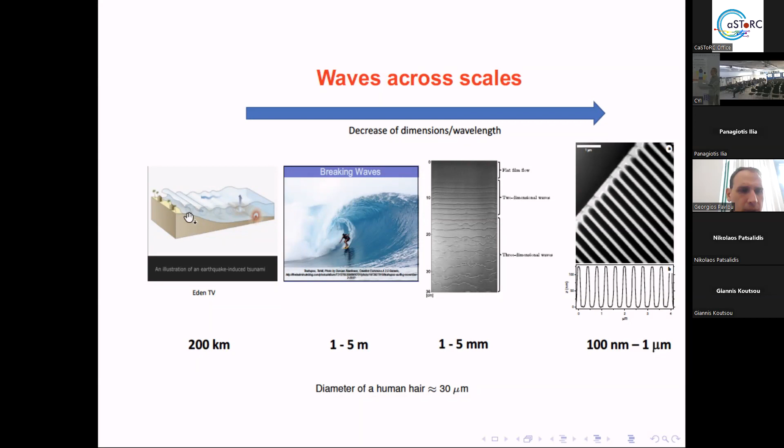So my main interest is to find unifying type equations and unifying mathematical ways of addressing such equations. So today I will talk more about this area of this diagram. But just to get an idea, here are some simple partial differential equations that describe some of these phenomena.

So if we start with wave motion, this is the celebrated Korteweg-de Vries, KdV, equation. This was the first time that solitary waves were found. So when you hear solitary waves, immediately you think of this PDE. It's a balance, it's about some steadiness, of course, but the balance between nonlinearity and dispersion. So these are just two physical things going on, nonlinearity and dispersion.

Then if we go further down the scale, we get equations very similar to this. If you look at this, there are more derivatives - this is the Kuramoto-Sivashinsky equation. Why is this interesting? Well, again, nonlinearity, mixing things up. But in addition, there is a fourth derivative here with a plus, which is diffusion - a bit like a second derivative on the right-hand side, but higher diffusion, so we call this hyperdiffusion sometimes. But then there's negative diffusion as well, because this term has the wrong sign. Usually for the heat equation we see it on the other side with a plus sign, so this is negative diffusion.

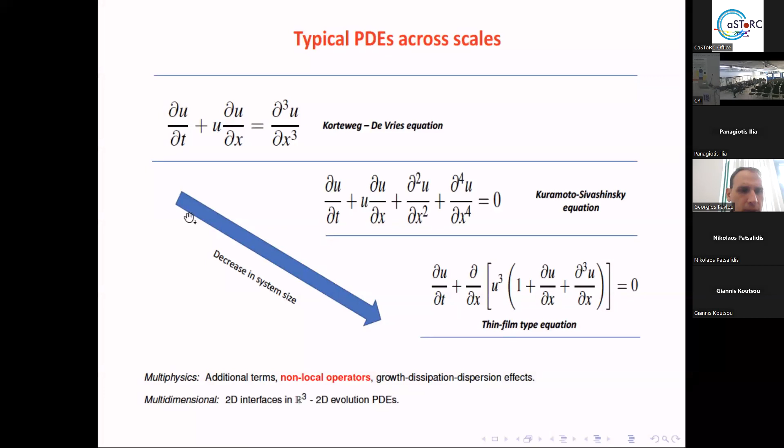Deriving these equations from first principles from the equations of fluid dynamics. So you're right, this term is dispersion - there is no viscosity whatsoever here. In this case, this term is surface tension, and that's why there's a high curvature, high derivative. And this term is inertial destabilization - it's to do with destabilization due to sufficiently large inertia. And here there's no inertia, that's why we get the degenerate PDE. But yes, these are all derived from first principles. Hopefully, and I'm probably already running very late, but hopefully I will show you how these are derived in a slightly more complicated example than these.

The objective is to do engineering on the small scale, particularly microfluidics, where things are fairly stable unless you have external forces doing things. For example, you can push these systems out of equilibrium by electric fields, magnetic fields, oscillations, and all these different things.

The basic feature at these small scales is that surface to volume ratios are large, and therefore surface tension is important. In particular, things like surface tension, electrical charges, and surfactants will all play a role.

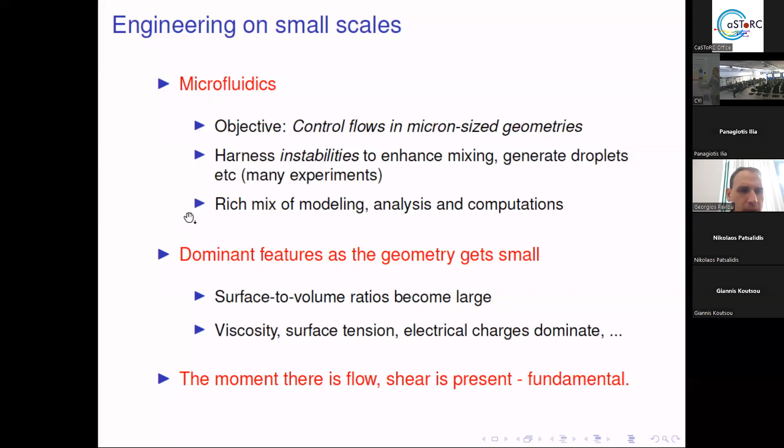I want to consider another physical effect: imposing shear flow on these things. In other words, they will be flowing due to either gravity or pressure gradients and so forth. So that's the objective, and here are some examples.

This is an example we already saw: a falling liquid film on an inclined plane, fed from the top. As things evolve, they become unstable, first two-dimensional, then three-dimensional, and by the time you're further down, that's spatial temporal chaos already. You can characterize all of that.

This is called an open system because there's only one liquid and then air, and you ignore what happens above. Whereas these types of problems have two fluids with an interface in between.

But always interfaces, yeah, that's the key — or more than two fluids too, which is even more interesting.

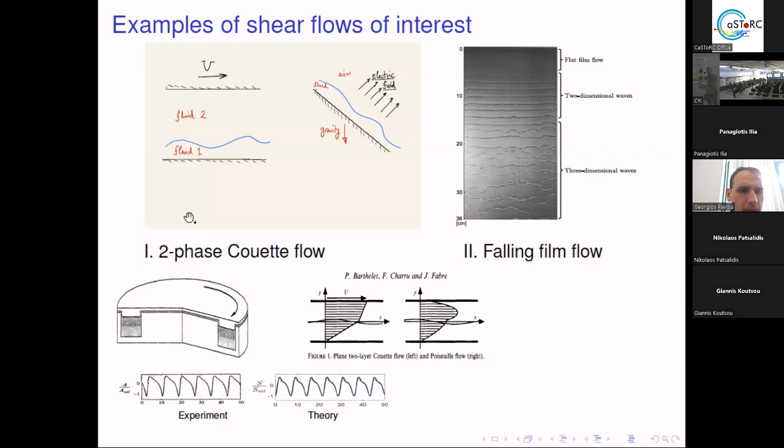These could be pure shear type flows, or you could also have a driving pressure gradient, in which case these would be piecewise parabolic profiles, as we get from exact solutions of the Navier-Stokes equation. So where do these waves come from?

These are classical fluid dynamical effects, hydrodynamic stability results. What we know is that if I have a single phase—one liquid, no interface—and I shear it, doing a hydrodynamic stability analysis via the Orr-Sommerfeld-type equations, you linearize and get your Orr-Sommerfeld equations. Then plane Couette flow, with just one shear, is linearly stable at all Reynolds numbers. It doesn't mean it's not nonlinearly unstable, but it's definitely linearly stable for all Reynolds numbers.

Experimentally, below about 1200 or so, they do not see any perturbations growing. Plane Poiseuille flow, on the other hand, again without an interface, just a parabolic profile, is linearly unstable for Reynolds numbers bigger than 5,000 or so. So again, small Reynolds numbers should be stable.

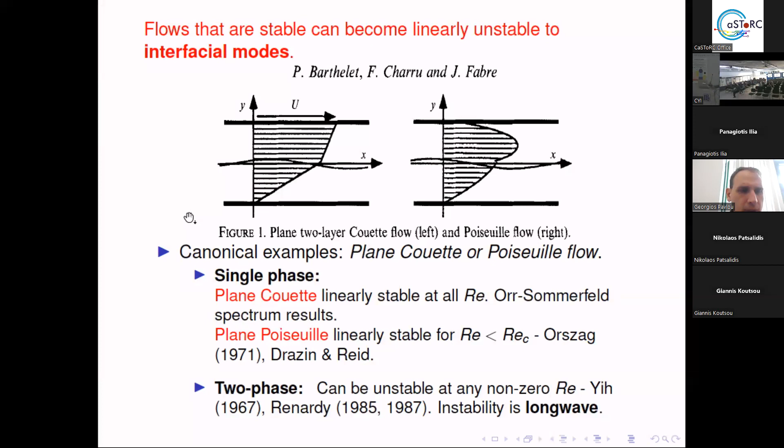The moment you put an interface in, these things change. In fact, you can show that the moment there's an interface there, it will become unstable. There will be an unstable interfacial mode active at any Reynolds number, irrespective of how small it is—it doesn't have to be critical and above. And the instability is long wave, though of course it depends on the various parameters.

This is what has been determined for two-layer flows: fluid one below, fluid two above, with different viscosities, mu1 and mu2. If the thinner layer... this result comes from analyzing the Orr-Sommerfeld equations.

If the thinner layer is also the more viscous, then you get waves, then it's unstable. So that's the result: if mu1 is bigger than mu2, then it's unstable.

So it all depends on the geometry of the configuration and the ratio of viscosities. The mechanism is quite complicated. I don't want to go into it here, but mathematically you can show this in a straightforward way.

So what do I want to do? I want to consider systems like this, having the experiments in mind. And what I want to do is follow the instabilities into the nonlinear regime. I don't want to stay linear, I want to go nonlinear.

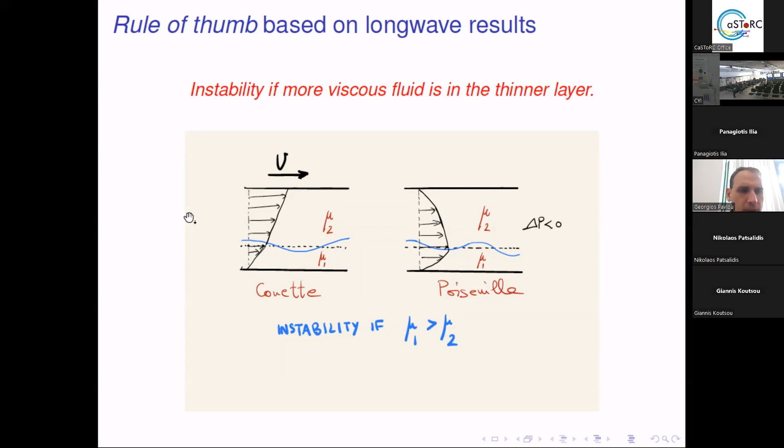The way we will do this is by doing an asymptotic analysis of the equations of motion with just one assumption: that this layer is thin compared to that layer. And that happens in experiment. That will be the only assumption I'll make. Well, actually not exactly the only one, but that's the main assumption.

So we'll derive reduced dimension models, partial differential equations, solve them, and then solve the Navier-Stokes equations directly, compare them, and then also compare with experiments. Then towards the end, the last third or so, we will look at multi-layer flows with interfacial slip.

In all these situations, I assume that the two fluids have no slip between them. But there are systems where you get interfacial slip, so we will replace those boundary conditions with Navier slip conditions.

So let's go through, and I think that goes back to the question earlier of how these are derived. The idea is that I may have more than two fluids, so a bunch of multi-layer configuration like this with lots of interfaces. Then the Navier-Stokes equations are valid in each region.

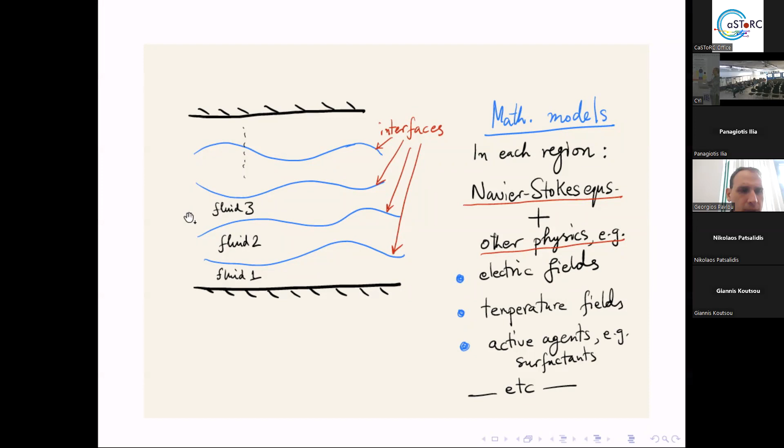There could be other physics as well, like electric fields or surfactants that diffuse and convect and also go into the interface, temperature, and so on. So this is kind of the multi-physics environment that we want, and we actually considered most of these things.

So what are the equations? The equations of motion are the incompressible Navier-Stokes equations, written here. Here I gave them for Newtonian flows, but these could be viscoelastic. You can modify with your favorite viscoelastic model, and I'll show something on that.

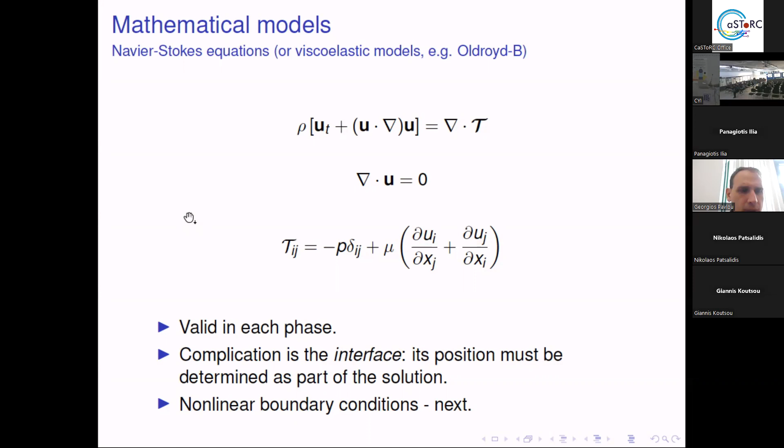This is complicated enough, but the additional complication is that the boundary of where you need to solve these equations is changing in time, so you need to determine that as well. So I need boundary conditions at the interfaces, and I'll show you what those look like next.

So if I suppose that there's some shape, a function that describes the interface between fluid 1 and fluid 2, then I can write down boundary conditions on this interface. And again, this comes from balancing forces — it's all mechanistic.

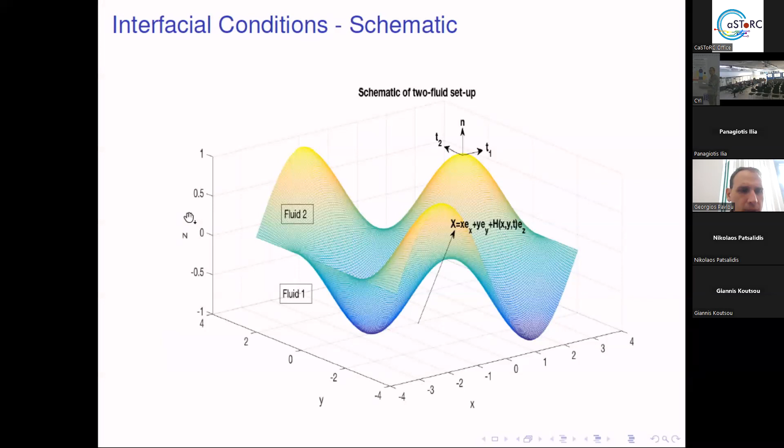And these are the boundary conditions. One boundary condition says the fluids are viscous, that the velocities are continuous. By this angular brackets, I mean the jump in quantities as I go from one fluid to the other — as I go from fluid 1 to fluid 2, this is the jump. So U is continuous. Then I have tangential stress balances, which says the tangential forces are continuous.

And the normal forces are discontinuous, and that jump is equal to the curvature times surface tension. So that's where surface tension comes in. Now, if you have surfactants, there will be additional terms there. If you have electric or magnetic fields, this will get modified and so on. But in principle, it's all the same — more complicated, but all the same procedure.

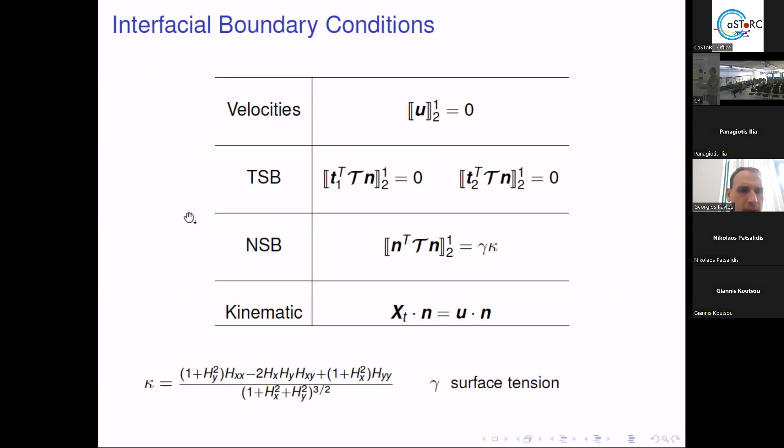And then I have a kinematic boundary condition at the interface that says the interface is a material surface — it's a sharp interface. And kappa is the curvature, and that's what it is in 3D. These are nonlinear, right? These are to be evaluated at y equals h, where h is not known.

That's a big complication. So let's try and develop this a little bit asymptotically. In other words, if I consider that previous system as very complicated, how would I try and simplify it in a rational way? Well, one way is to assume that the waves are very long compared to a typical length scale of the system, which is the height of the channel. This leads to long wave, fully nonlinear long wave equations.

That was a little bit—that's exactly where that last equation I had in the slide with the PDE models. The degenerate PDE comes from this type of model. Now, sometimes you're not really justified to do this.

Here's a situation where you're not. If you have a Couette device with a thin layer, either at the bottom or the top, you can say the wavelength is very long compared to this size, but that's not really the case. Usually the wavelength of the waves on this layer, even though it's thin, is of the same size as the thickness of the channel.

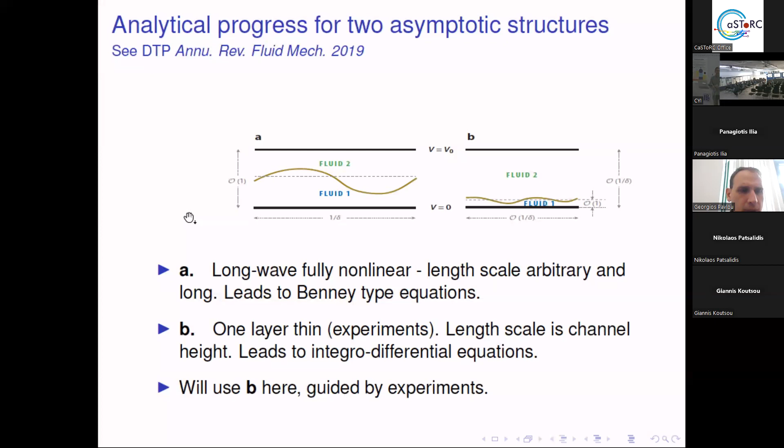This is probably very busy, I don't need to go through it all. Very briefly, we do formal asymptotics, where in the thin layer I take advantage of the fact that it's thin, and I can do the mathematics more easily, then couple it with what happens in the thick layer. There's lots of details, and you have to match the two things together.

And of course, there's all sorts of mathematical questions, like you get PDEs—how do you know they're any good? If you can manage to prove global existence and so forth, then it should be a good model to try and push to large values of the parameters. And that's one of the things we try to do.

Here's how one would do it—I'll just sketch it, we don't have enough time. This is how one would do it if I had the thin lower layer. So epsilon, let's say in an experiment, you would non-dimensionalize that to 1, and epsilon is something like 0.1, 10% of the thickness, or even smaller. That's what you see in experiments.

But here we assume it's epsilon and try to do an analysis based on epsilon, where I will allow for the interface to deform, but have a wavelength which is as big as that. So the wavelength will scale with the channel.

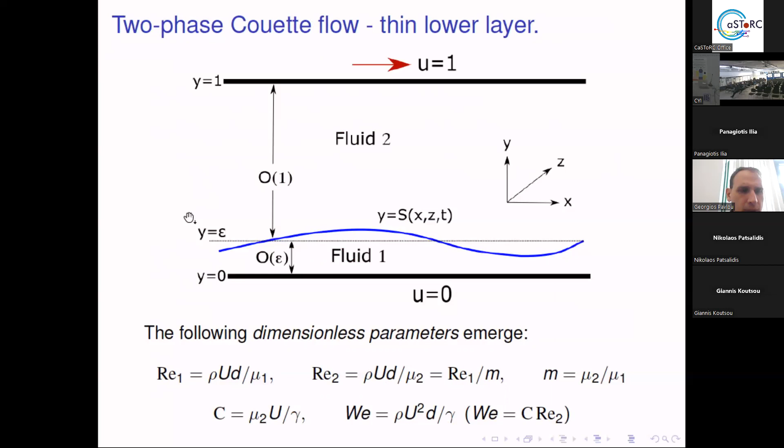Okay, so how would you do this for a thin lower layer? Well, what you do is you introduce another variable, a new variable zeta, which describes the thin layer. These are technical details, so I don't want to bore you with this. I'll say it differently—this is all symbols, and then you can do the algebra, but the idea is the following.

Without this, the interface is flat and the layer is undisturbed. So you ask the question: how small, what's the smallest amplitude, smallest epsilon to some power, can I have where this perturbation will become nonlinear for the first time? That's the idea—that's why we call it weakly nonlinear.

So if you do all that, you can write down expansions. It's not important exactly what the powers are, but everything follows from the equations. And you can solve this problem, but then you need to also solve what happens in the upper region.

And this is where things become interesting, because in the upper region, you get elliptic type operators, you get Laplace type operators, because you no longer have a separation of scales, right? The y is no longer smaller than the x—the x and the y are the same. Therefore, you get the full Laplace coming out.

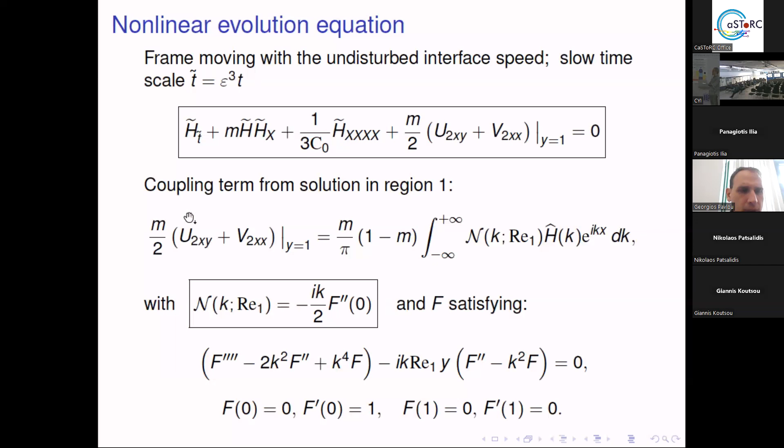So when there's slip, this gets a little bit more complicated. But let's see what happens a bit further down.

Once you rescale, you can rescale this thing so that you put a 1 there. You just rescale space and time, and then in two-L periodic domains, you can write down this non-local term as really just the Fourier series. So in Fourier space, it will simply be n times h hat. And then I know point-wise, for each k, for each integer k, I know what that is by solving that previous problem.

And lambda is a crucial parameter. It has the viscosity ratio coming in. So this is called viscosity stratification. If m is bigger than 1, then I get stability. If m is less than 1, I get instability, which is exactly what was found from the Orr-Sommerfeld.

Yeah, I mean, you're there. There is, yes, there is. Yeah, you're right, there is. It's because this is always stabilizing. So the way you deduce this is that this is always stabilizing. So the only way it can be destabilizing is if the real part of this is negative, and then you can go back and back these out. But there will be a K dependence in the full spectrum, and it will always be well posed because of that. Yeah, the short waves will be stable.

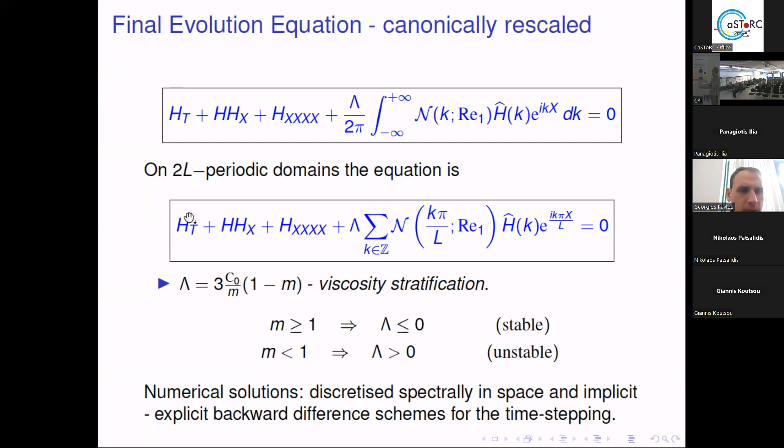And then you can go and solve this numerically.

Going back to Panagiotis' question, this is the spectrum. So it's minus lambda times the symbol, that I know numerically. Actually, I know it analytically as well. I'll show you later. And then short wave stabilization.

Now, what's interesting is to look at large K. Large K typically tells you, if you have a PDE and you look at large K, it will tell you kind of intuitively the behavior, the well-posedness of the PDE. If this S, the growth rate, doesn't decay for large K, it means you're in trouble. That would be a Kelvin-Helmholtz type instability.

So in this case, what happens for large K, this is dispersion. There's an i there. So this is some kind of non-local dispersion. This is surface tension, but then this is what the viscosity stratification does. So it introduces a constant value at infinity. Again, this agrees with the physics that comes from the full Orr-Sommerfeld equation that has been classical.

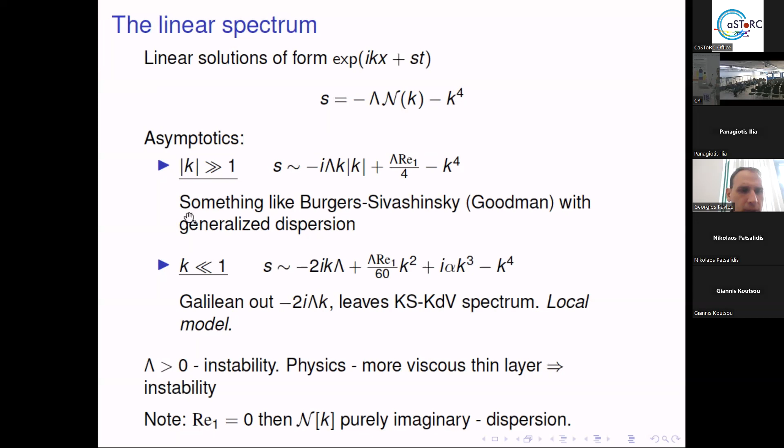Another detail is that if the Reynolds number is 0, there is no inertia, then I lose the instability. I have purely dispersive waves. So if I switch off surface tension as well, it's kind of a generalized KdV type equation. So it's kind of water waves with a non-local dispersion. And there's a lot of interest in those problems lately.

Here's some experiments.

The main thing I want to say here is that from the size of the experiments, we could back out the size of the wavelength I need to use for this PDE, and then I can solve the PDE and compare it to the experiments.

The experiments, what they do is they put a probe at the interface and they measure the height of the interface at a fixed point. If it's a traveling wave, that signal will give you a periodic traveling wave, modulo the speed of the wave.

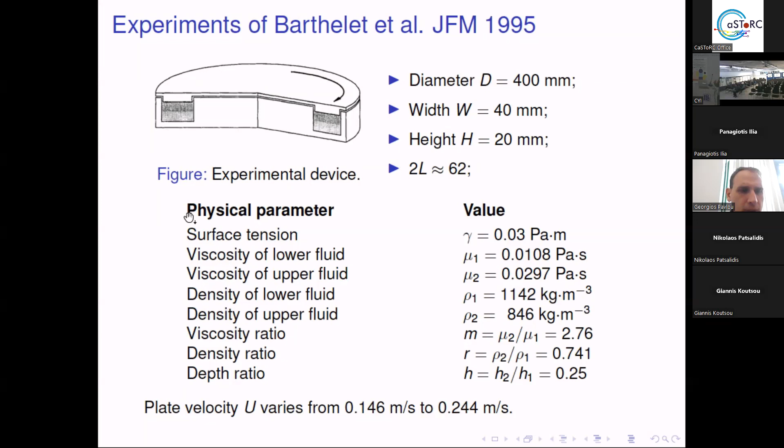Andreas asked about gravity. It can be important. So it's there, and of course it's always stabilizing, so it should damp things a bit.

So here's a comparison, just to show that this model does really well. There were many attempts to get some of these results by extensions of the PDE, but it looks like you have to take into account these non-local terms. It's very crucial, so we're quite happy with these comparisons.

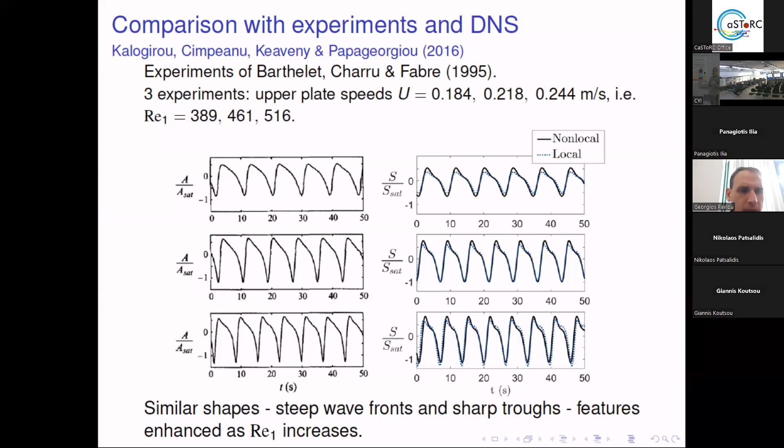We also did direct comparisons with Navier-Stokes simulations, and they're also quite good. One interesting thing found in the experiments was bistability. They fixed the Reynolds number, the speed of the plate, and observed that you could get two types of waves - this wave or something twice that wave at the same Reynolds number, and they were both stable. It's a nonlinear system, so you can have two different states that are stable.

We wanted to see if we could get this from the model equation. There were ad hoc attempts to do it by adding terms, and they weren't successful. So what we did is a detailed mathematical study with Saleh Tanveer, and we recast this so that we put a viscosity nu in front of the fourth order derivative. That's just a bit easier, keeping everything 2 pi periodic.

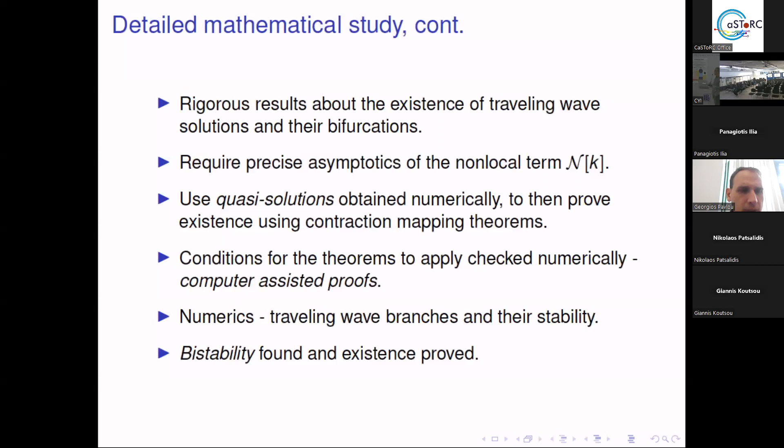So let's look at some numerics. We looked at traveling waves and their stability as well. What I'm showing here is for a certain value of the parameter, 1/20, which tells you the wavelength in a sense. K equals 1 means it's a unimodal type solution - it covers the whole domain, one period. K equals 2 is bimodal, it repeats.

That's the bistability type thing. What's shown here is some norm, the energy norm, versus this parameter lambda, which is the bifurcation parameter for different Reynolds numbers - 20, 50, 100.

Where you see dashes, it means the traveling wave is unstable. You can check the stability by calculating the Jacobian and finding the eigenvalues as you compute, and then there are bifurcation points, and it becomes stable again.

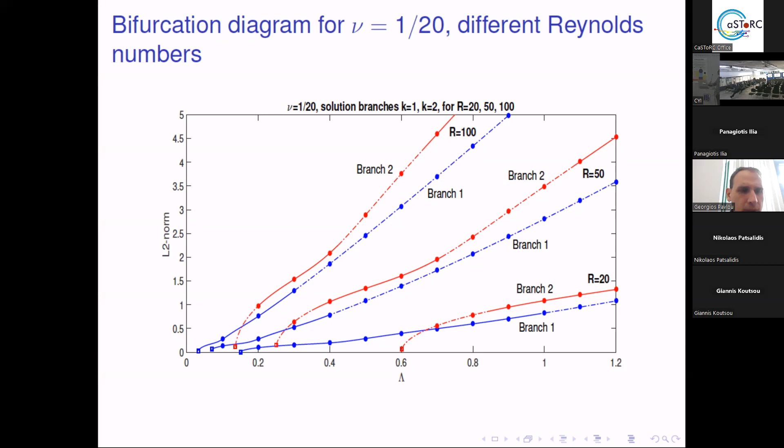But what we see in all cases, if you look at branch 1 and branch 2 here, they're solid at the same value of lambda, at the same value of the parameter. So they're stable - they both exist and are stable for a single value of lambda. That means bistability - I can have both of these solutions for a single value of the parameter. This is generic for different Reynolds numbers as well, and this explains the bistability observation seen in the experiments.

So these are some results. The blue is stable, the red is unstable. These are what the solutions look like on branch 1 - they fill the complete period of the device. And these are bimodal, so these repeat twice around the toroidal region of the device.

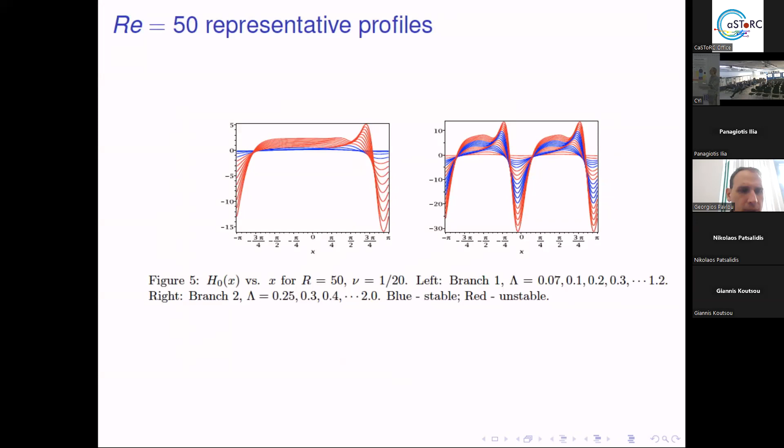And they look very similar to the experiments. We need to do a direct one-on-one comparison, but that's something to do next.

Some extensions: you can extend all this to viscoelastic flow. You can put Oldroyd-B fluids in both regions and do the same things. So the formalisms are all the same, you just do different physical things, and you can also do surfactant effects. We did a lot of work on that.

Just out of interest, the viscoelastic partial differential equation is this, but there's one detail: I now have an additional term which involves the Weissenberg number. This is the fact that the flows are viscoelastic, and there's instabilities due to streamline curvature, essentially. Now this zeta is always positive, and this is negative diffusion.

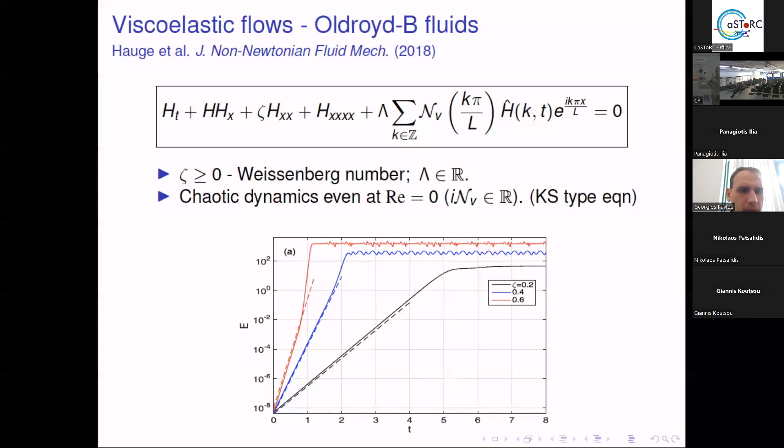So this will always destabilize the flow. In a viscoelastic system, even at zero Reynolds number, where this term is pure imaginary and therefore dispersive, I will still get instability. In fact, you can even drive the system to chaos. These solutions are actually chaotic if you run them long enough and do the return maps and so on. So it's an example of chaotic dynamics at zero inertia, all due to the elasticity of the fluid.

Now for the last part, I want to talk about slip at interfaces, and I'll begin with some evidence and some simulations. I'll show this and then try and model it and see what we can get.

About 20 years ago, Zhao and Macosko did experiments extruding polymeric fluids in many layers - I think as many as 64 or 128, a power of 2 for some reason. Then they checked the flow rate coming out, and noticed that if you assumed no slip at the interfaces, so the velocity was continuous, the flow rates were way off.

But if they allowed for slip at the interface via a Navier slip condition, then they could back out a slip length from their observations. So that was the first evidence.

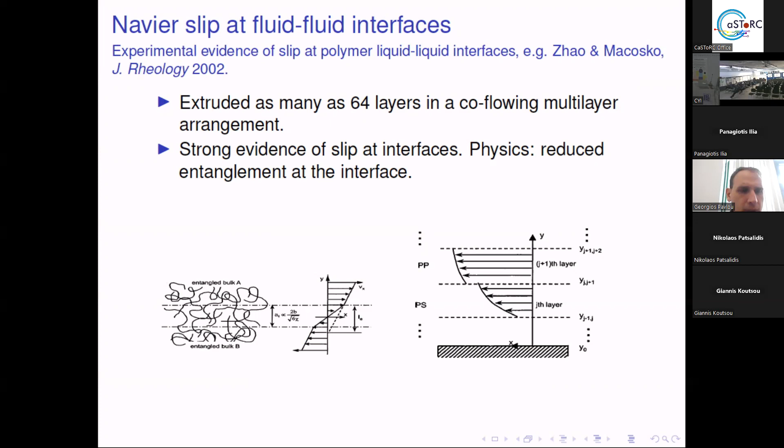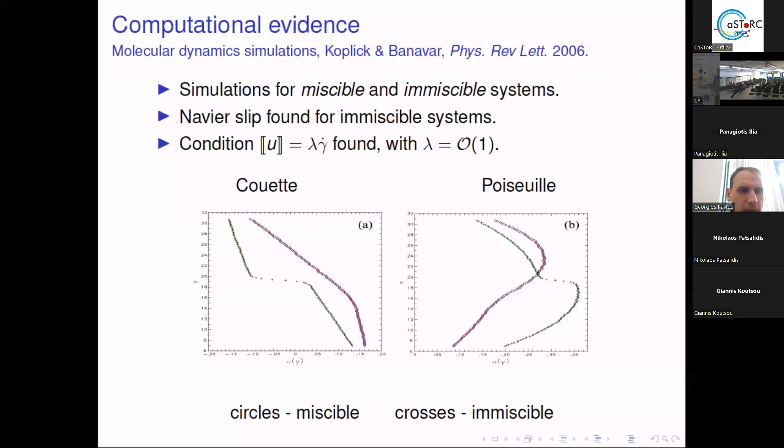So it looks like, from a mathematical modeling perspective, it's reasonable to replace the continuity of velocities with a Navier slip condition. This is what we did, without having to take values of the slip from the experiments - and the simulations give values of order 1, so that's quite good news.

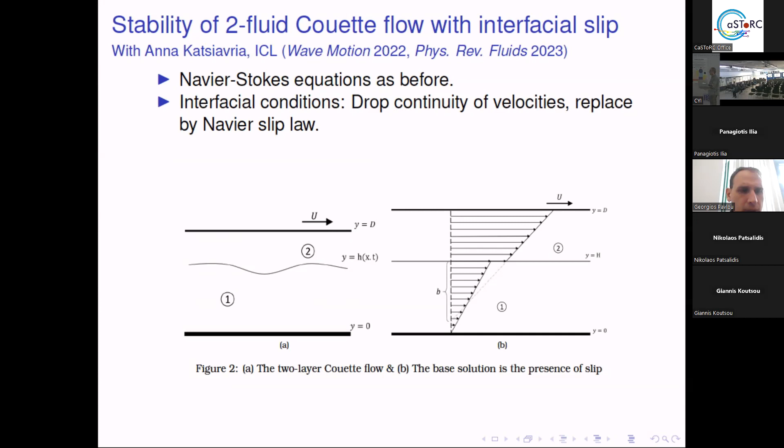So this is what the flow would look like if you had slip: there will be a discontinuous velocity profile. It's always linear because these are simple shear flows, but there's a discontinuity there. To me this was very interesting when I first saw it, because it's like a Kelvin-Helmholtz instability for inviscid flows, but viscous - quite an interesting take on that. There are some similarities with Kelvin-Helmholtz, as we will see.

Okay, so everything else is the same. The only change is the boundary conditions. If you don't have slip, then the kinematic conditions on either side are really the same. But here you have to use one of them, and then the other one is continuity of normal velocity. So that's the first tiny change.

These are completely compatible with what happened before. This is without loss of generality. You can do this for the other problem too. Then I have the normal stress balance, which is here, and tangential stress balance, again the same as before.

But now what I need to replace is the continuity of velocities at the interface with a Navier slip law. So this is just that written in vector form. If the slip length, which is b in this problem, is 0, then it says u1 equals u2, in the tangential direction. And of course, they're also equal in the normal direction.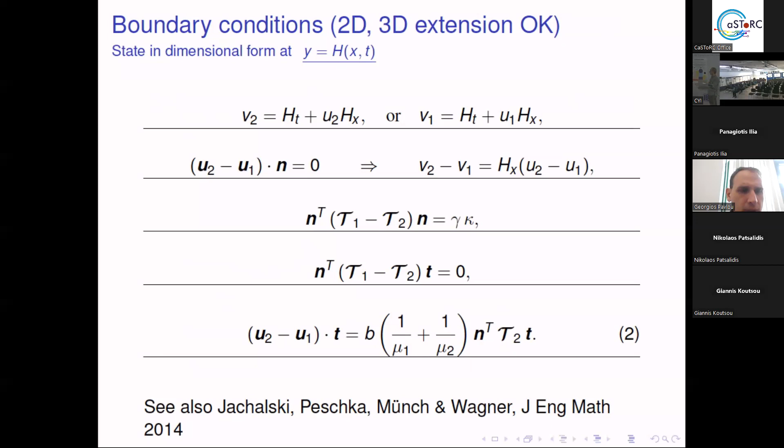So this is the new condition I need to impose. Now I could replace this with a T1 there because I have continuity of tangential stresses, and that doesn't matter. These parameters are just there for scaling purposes to get the dimensions right. It doesn't matter, they can be absorbed in the B. Okay, so if you do all this,

then again, this is the new equation, here. This is the continuity of velocities, if you like, and L is the dimensionless slip length. So if this is 0, all this term is gone, and U1 equals U2, V1 equals V2. So that will be satisfied identically. Therefore, you need to go back and introduce another equation.

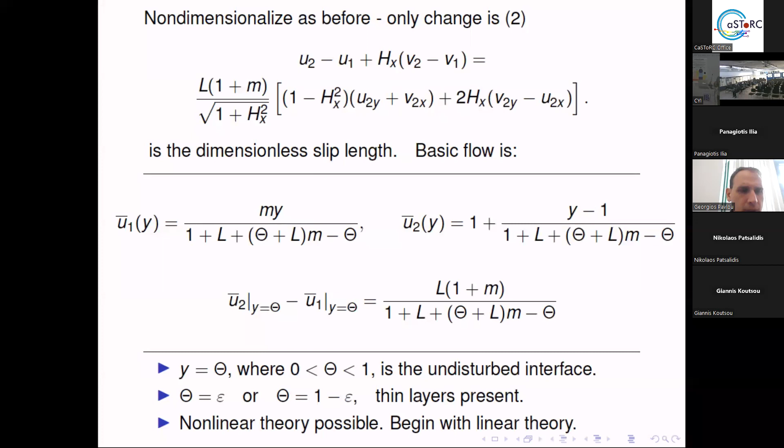So, and these are just typical basic profiles. They're still linear in Y, but they have a jump of size L, which is the slip length. Okay, so what do we do? Well, we can do nonlinear theory as well, but we can also do a linear theory of this. That would be quite useful to do for the full linear Orr-Sommerfeld problem. So I'll begin with that.

So this is 3 different configurations just to set the stage. This is no slip. This is a little bit of slip, where L is order 1. And this is L equals infinity, an infinite amount of slip. So this is even closer to Kelvin-Helmholtz. Okay, but it's amazing that this can be done analytically, in fact.

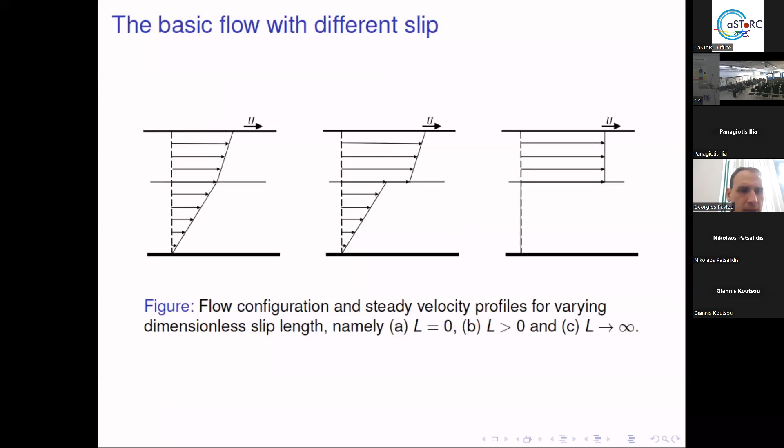And so what we want to do is to say, well, if you get a solution for this, how big does L need to be to get that? And sometimes L equal to 1 is good enough. So it's not a crazy limit to study.

So how do I do linear theory? Well, again, linearize the equations. I will get Orr-Sommerfeld equations in each region. Here they are, right? Lots of parameters again. Now I have the slip length as well. I have a Froude number. Now I have gravity as well.

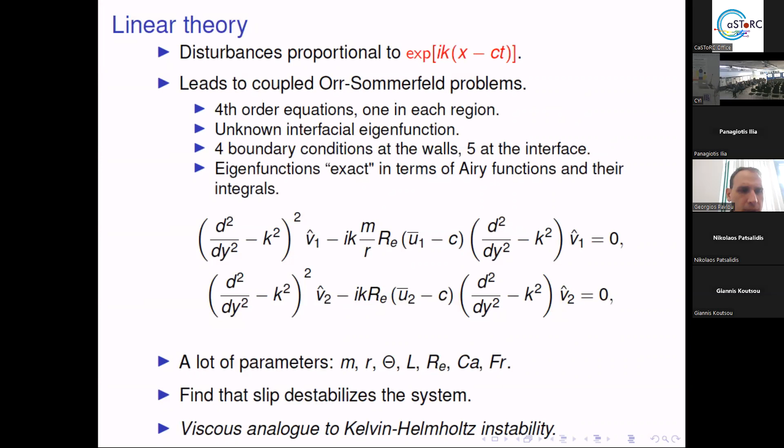And what we find is that slip destabilizes the system. So this is kind of a new instability. Even in situations where the thinner layer is the less viscous, you can still destabilize it due to slip. That's what this shows.

Okay, I don't think I have too much time, so let me see if there's anything I want to say here. But yeah, so you can do long wave theories, and this is maybe we'll just look at this example. If the imaginary part of C—so this is a long wave theory, I just look at the first time C becomes imaginary.

If it's positive, I'm unstable, and if L is 0, I'm stable for all values of the parameters. But then as I increase L, I become unstable. So this shows that I can induce instability with the slip.

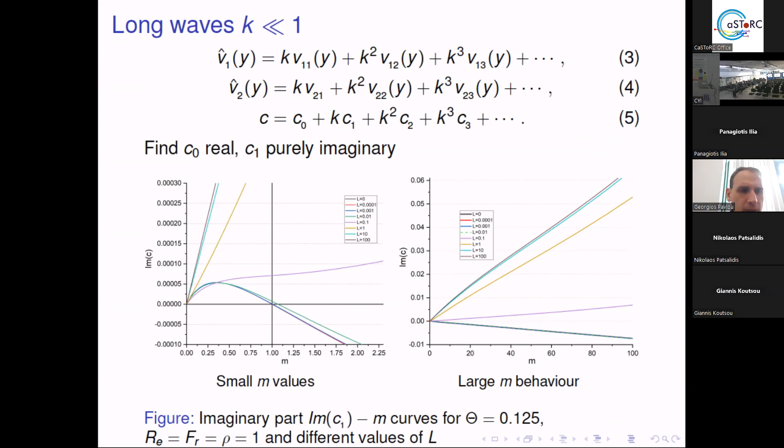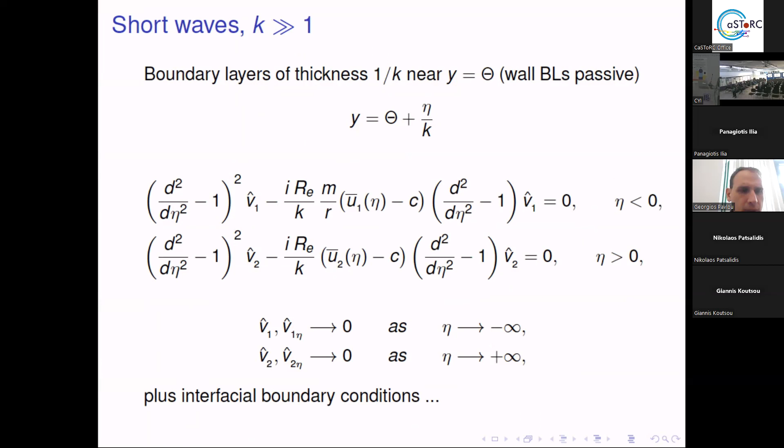You can also do the short wave limit. Okay, before that was a long wave limit, that's a regular perturbation. The short wave limit, you need to introduce boundary layers near the interface and all these things. Again, it's very doable, and you get exact expressions.

And this is what happens if you solve the full dispersion relation. So this is the growth rate versus wave number for a case where surface tension is not present. Okay, so I removed surface tension so that I'll be able to see something at large K. So this is the long wave result, the analytical result.

This is the one-term short wave result. This is a two-term short wave result. The effort to get this and this is the same, it's just a bit more algebra. So, and then in between, where we solve the equation exactly, we get a connection of these two branches. So again, what we see is short wave instability for large wave numbers.

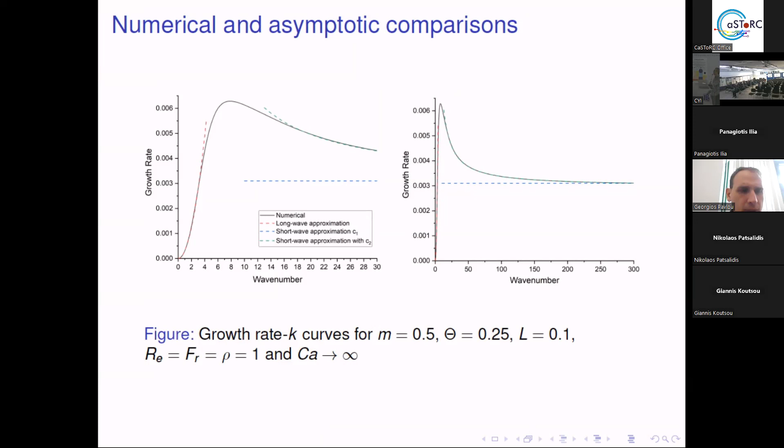Okay, and then there's another phenomenon that comes about, and that's the following. Let me try and show it here.

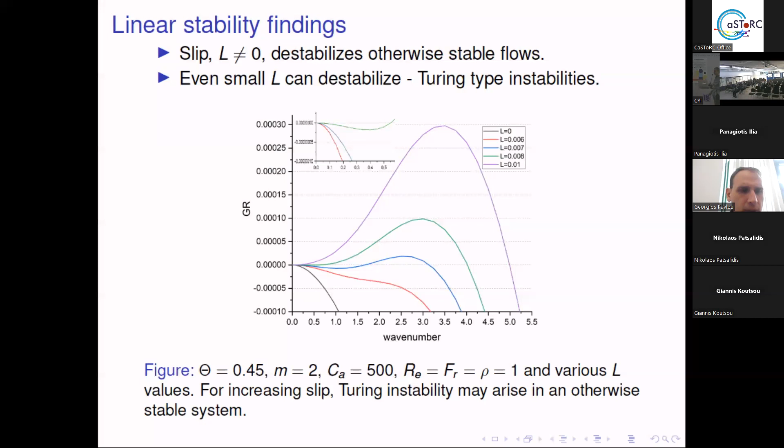So this is a very interesting phenomenon, because what we did here is the same analysis as before, the nonlinear type analysis as before. The only difference is now we put the thin layer on top. So just to complete everything. Again, surface tension is there. This is gravity now, and R is the ratio of densities.

So you can be stable or unstable because of gravity, depending on what the ratio is. Then there is a term like this that involves the slip - beta is the slip. So that's like KdV. And then there's this non-local term, which is now given by this expression, F double prime at 1, now because I'm at the top. But it's a different equation, okay?

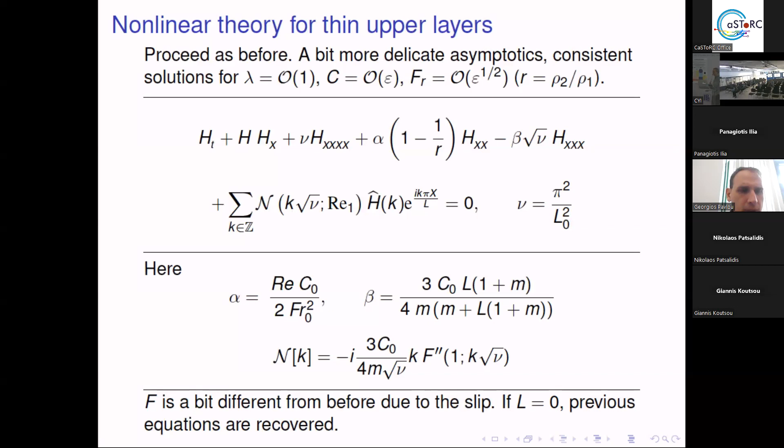The equation is more complicated, okay? It doesn't matter - more complicated, you can still write down Airy functions and do all these analytical things. But the growth rate is here, right? So again, you can get instability because of that term.

Now, what was interesting for us was the following special case, and then I think I'll almost stop. If I take a case where m is less than 1 and L is 0 - m is less than 1 means that because it's the thin layer on top, right, m is less than 1 means the thin layer is less viscous. So it should be stable. So L is 0, everything is stable.

Then we can show analytically, because we have a good handle on all these Airy functions, that even for small m and small l, you can get instability. And this is a manifestation of that instability for not so small an m and l, okay, some 0.5 or something. But it's exactly this Turing type instability. So this would not be there without slip.

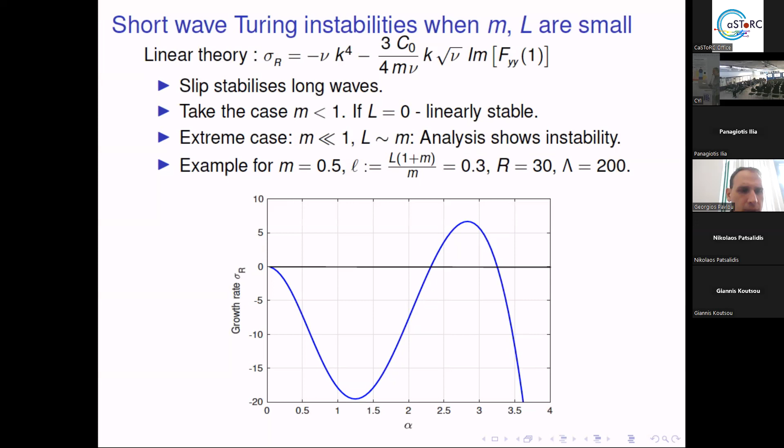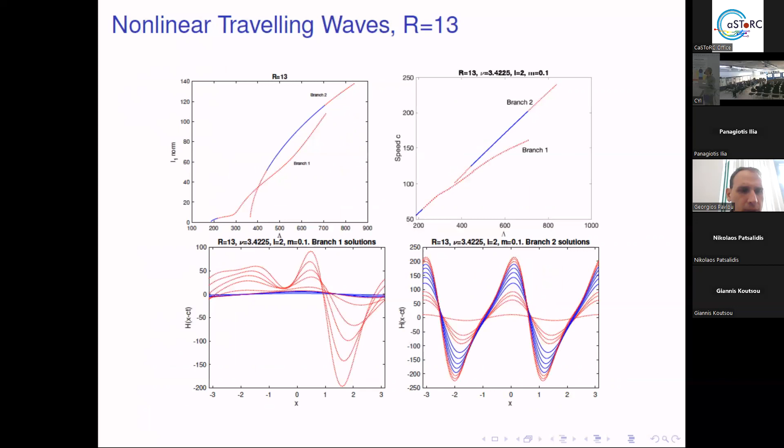And then we can compute traveling waves and do their stability, and that's what's shown here - again, solid and dotted lines. One thing we have not found is bistability for this problem. Only one of them is stable, but maybe there are some - we just haven't looked far enough. And these are different Reynolds numbers. As I increase the Reynolds number, the waves get more nonlinear.

So I think I'll come to the end and see if there was anything I wanted to point out. Extensions to 3D are important, so we're looking at those. And all these non-local type analyses are pretty typical in all sorts of problems, including population dynamics and anything with species that diffuse in a multi-scale environment. So yeah, with that, sorry for running late, and I'll stop there and take questions.

Thank you. This was fascinating.

I have a couple of questions, but my most urgent one is about the polymer liquid-liquid interfaces, because it's relevant to what we do at CaSToRC. Have people looked at the molecular dynamics and quantify the size of that interface region? I think Koplik and Banavar, they said it was, I think, just a couple of - how do you call it - the core size of the...